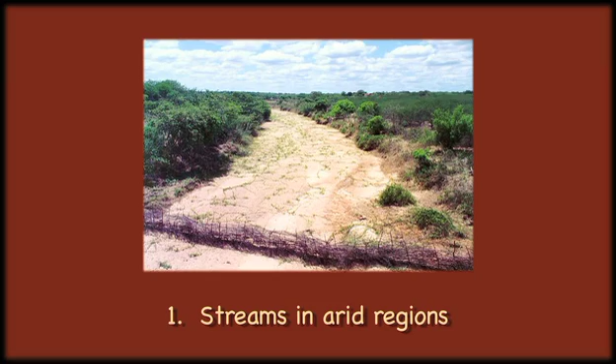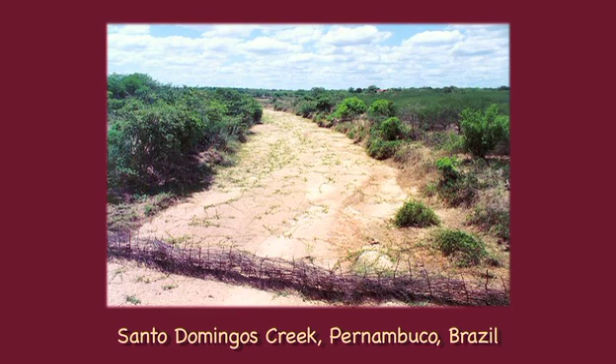There are three types of streams in nature: perennial, intermittent, and ephemeral. Perennial streams always have flows, with the low flows sustained by permanent baseflow. Intermittent streams have flows only a few months out of the year, with the low flows sustained by seasonal baseflow. Ephemeral streams have flows only during and immediately following rainfall.

The location of the groundwater table, above, at, or below the river bottom, determines whether the flow is perennial, intermittent, or ephemeral, respectively. The depth to the water table varies across the climatic spectrum from arid to humid regions. In humid regions, the water table is close to the surface, while in arid regions it lies at much greater depths. In general, the drier the climate, the greater the depth of the water table. Therefore, ephemeral streams are common in arid regions.

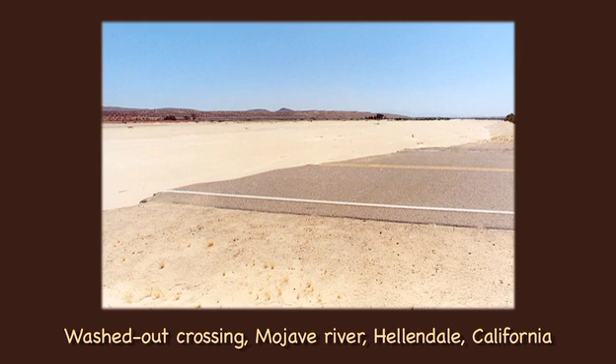Erosion and sediment transport peak at a mean annual precipitation of 375 millimeters, which corresponds to an arid region. Thus, streams in arid regions are likely to carry significant quantities of sediment. From a geomorphological perspective, when streams carry a lot of sediment, their aspect ratio, that is, the ratio of width to depth, is large, typically between 50 and 100. Thus, river crossings in arid regions pose significant design challenges. The issue is how to provide a crossing in a wide ephemeral river channel effectively and economically.

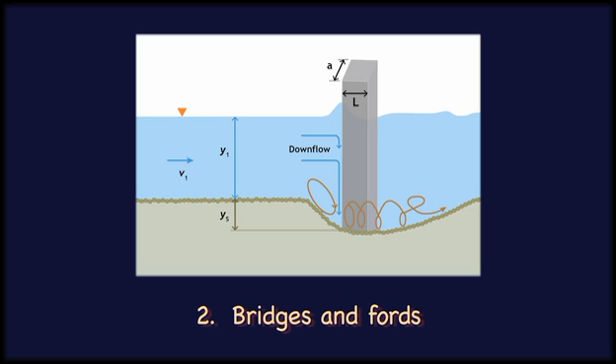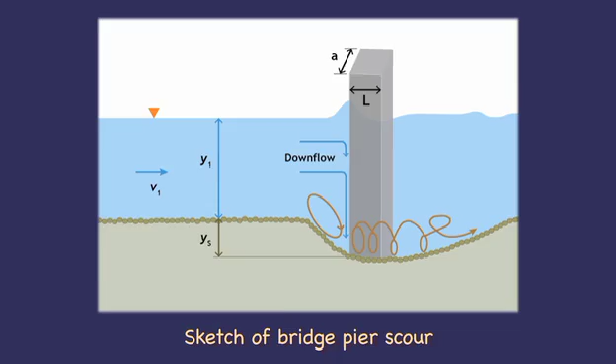Bridges can be of many types and shapes, but they must span all or most of the stream width. Not spanning the full stream width in order to save construction costs can lead to loss of hydraulic performance. In such cases, the stream or river will eventually reclaim its full width, undermining the bridge foundation and endangering the superstructure. Excessive flow velocities near bridge piers and abutments are a common cause of local scour, which can lead to bridge failure. Bridges are usually built when traffic or the road network's importance justifies the cost.

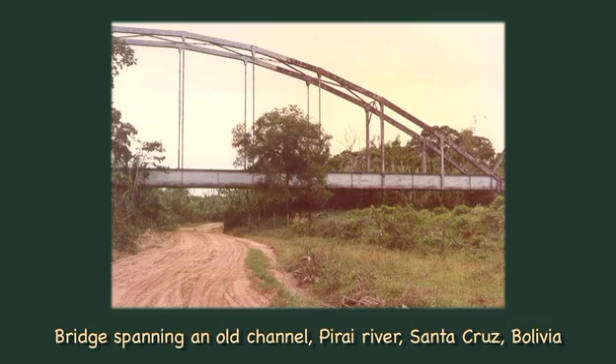Most road bridges are permanent structures and are vulnerable to extreme hydrologic events. Rivers, particularly in arid regions, can significantly overflow their banks, spilling onto the floodplain. Additionally, floodplain rivers may change their course, defying the bridge's ability to perform its intended function.

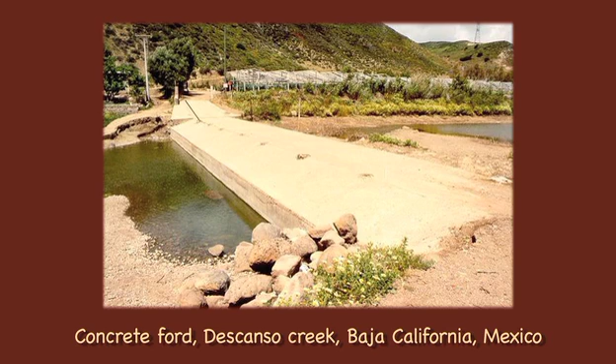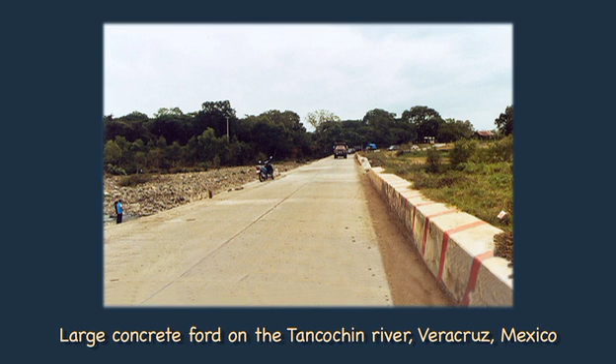Fords are an alternative to bridges in cases of low traffic or lack of sufficient resources. Fords are engineered to cross the stream without a bridge when the flow is low or non-existent. In arid regions, fords are common in places where water flows only a few days out of the year. In some cases, fords have been built even in perennial rivers. The disadvantage of a ford is that it may not be operational a few times during the year, but when this is weighed against the cost of a conventional bridge, the choice is clear. Fords are common in rural areas and in developing countries where traffic is low or resources are limited.

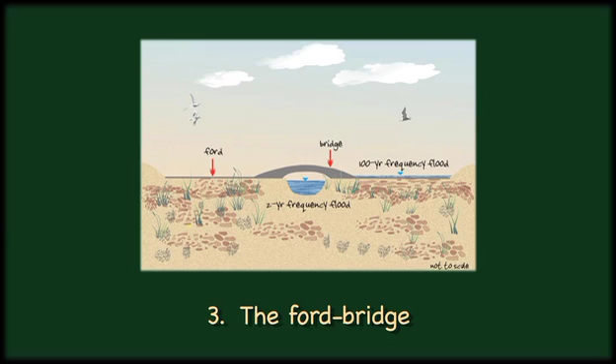The ford bridge concept draws from the strengths of both fords and bridges. Bridges are permanent and costly. Fords may be temporary or permanent, but are comparatively inexpensive. Bridges are vulnerable to extreme hydrologic loads, while fords are generally able to resist most loads. Bridges are always usable as long as they do not fail. On the other hand, fords may be out of operation a few days per year. A ford bridge is a combination of ford and bridge, featuring most of the advantages and almost none of the disadvantages. The ford bridge works like a bridge during dry weather and like a ford during infrequent floods.

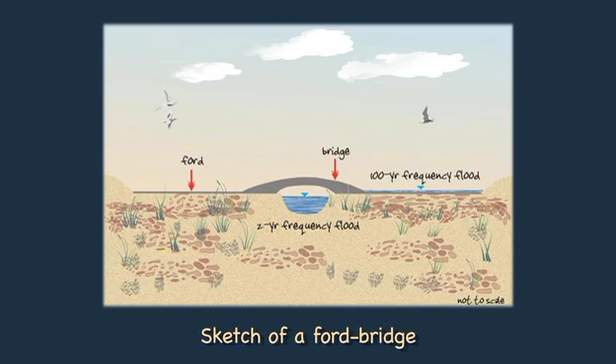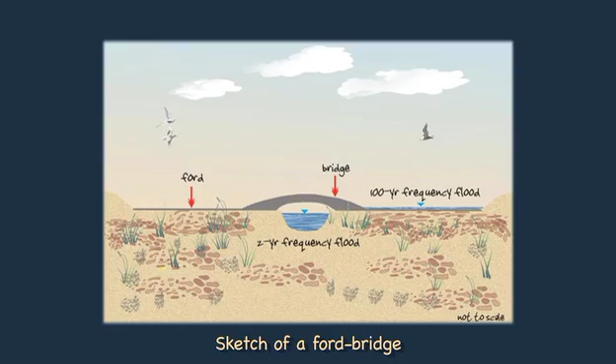A ford bridge in an ephemeral stream looks like a ford, but it has a relatively small bridge designed to pass the mean annual flood. The ford bridge can span the entire width of the river. There is no need to constrain the river in any way, and there are no bridge piers to scour during floods. Yet most of the time, usage of the ford bridge will be similar to that of a small bridge. Essentially, the ford bridge looks like a ford only when needed. At other times, the focus is on the bridge.

Thus, for wide ephemeral streams in arid regions, particularly in developing countries, the ford bridge concept offers a unique combination of functionality and economy. The Arizona crossing, developed for use in the U.S. Southwest, is a type of river crossing similar to the ford. When a culvert is included, the Arizona crossing is similar in principle to the ford bridge.

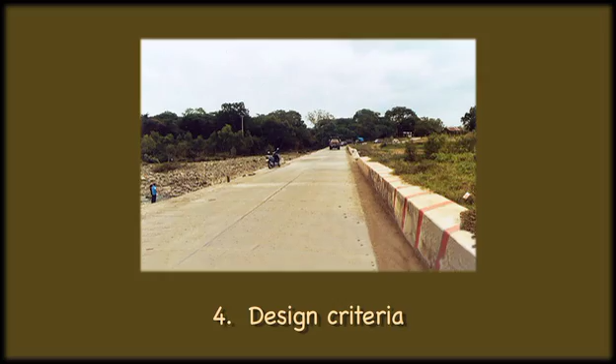All bridge crossings are designed to sustain selected hydrologic loads. These are usually frequency-based floods, such as the 50-year or the 100-year flood. In a typical bridge design, the flood peak of a given frequency is expressed as flow velocities and used to calculate the scour at bridge piers. In contrast, a ford crossing has no piers. The only design requirement is the proper anchoring of the slab to reduce the possibility of uplift. As in the case of a bridge, failure of a ford under extreme hydrologic conditions remains a possibility.

The components of ford bridges should be designed as fords and bridges, respectively. The ford component is pretty much the same as that of a conventional ford. The bridge component, however, is much smaller than a typical bridge. The bridge design criteria should be the mean annual flood, that is, the 2-year flood, widely interpreted as the channel-forming flood. This is in contrast with the 50-year or the 100-year flood frequency used in conventional bridge design.

The ford is designed to withstand infrequent floods, such as the 50-year or 100-year flood. The ford distributes the hydraulic load across the entire channel width. Thus, it is better able to sustain infrequent floods. The bridge deck, lying below the 100-year flood level, is designed to withstand the hydraulic loads.